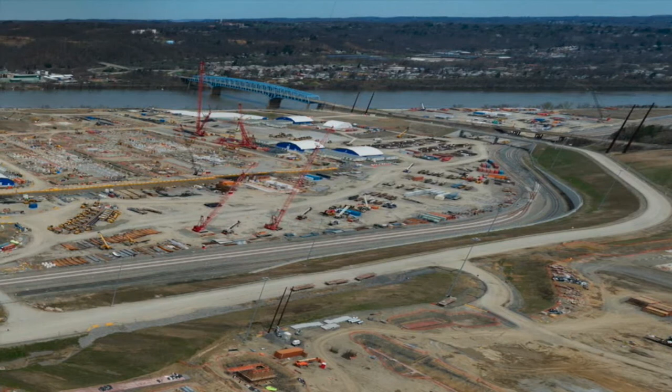The expectations you would have of a twin need to be met for a digital twin, and of course the first of those is you would expect of your twin reality—it has to correspond to the physical. We say that's about capturing the digital context of the project or the asset, and we do that through reality modeling. Reality modeling uses overlapping photographs and imagery or laser scanning to the extent that's available, but processes it into a reality mesh that's engineering ready, capturing that digital context, including the environs and surroundings and utilities and so forth for an infrastructure project.

So that's the first requirement—you could say it's the reality represented by the digital context. And then we say if it's going to be a twin, the purpose it serves, it needs to explain and provide insights and understanding into the behaviors of what we're delivering or operating in infrastructure.

And we could say that that requires veracity, if you like, explanatory capability. To me, the way we accomplish that is for our digital twin to be comprised of digital components that understand themselves. They are the stuff of BIM, if you like, but we can also glean digital components by classifying the reality mesh with machine learning, and maybe we'll talk more about that.

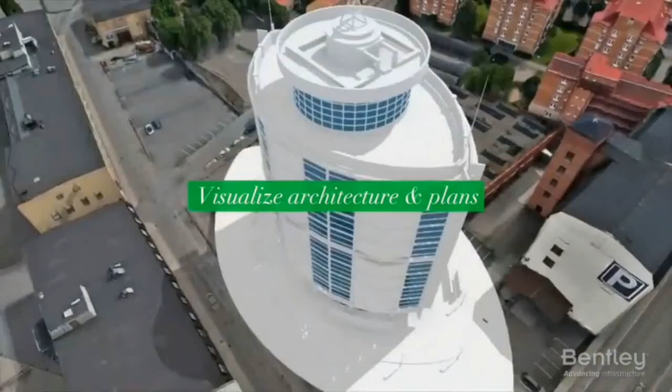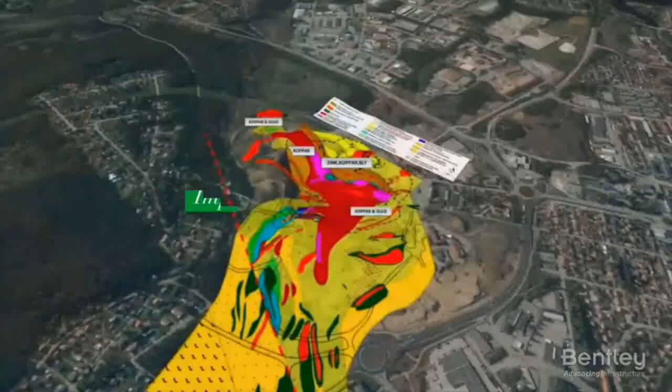But the benefits are being able to have the immersive visualization, if you like, where everyone understands the project in the same way. Everyone understands the site in the same way. It'll be an evergreen site. It ends up being enlivened, if you like, with the simulation of the BIM designs and, as you know, the vegetation and so forth that would finish it, so that it can be evaluated as well by the owners and so forth.

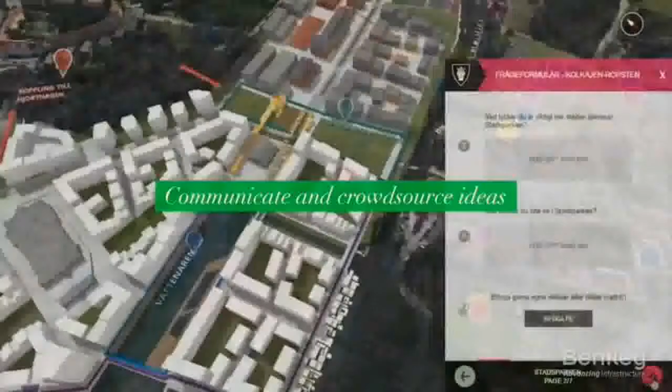Thanks to immersive visualization, it's more intuitive and, in fact, easier to use and to adopt than would be the separate technologies, for instance, of BIM or reality modeling. When you bring it together into a digital twin, for site work that's been up until now done in 2D, you can sort of leapfrog into a digital twin approach with OpenSite Designer.

So my point is that the advancements are advancements in being easier to use and approach even than preceding technologies, and certainly something that has the same immersion as in our real world is most natural to work with and provide these benefits. Analytics visibility for those who then would like to use their own intellectual property in improving their site design is yet further available in that respect.

But you asked about going to digital cities from, if you like, digital sites, and that's a matter of federating digital twins together. They all have the characteristic that they're geospatially referenceable, and in terms of computer architecture, software engineering, they can be referenced and federated together. In the UK, they talk about a national digital twin.

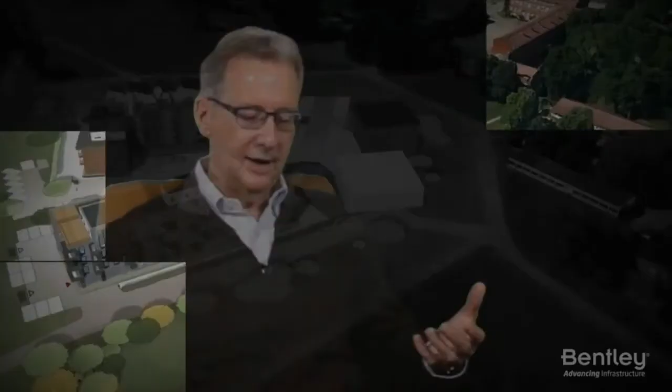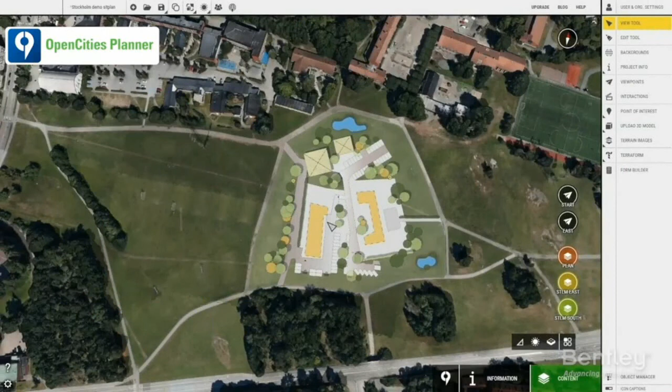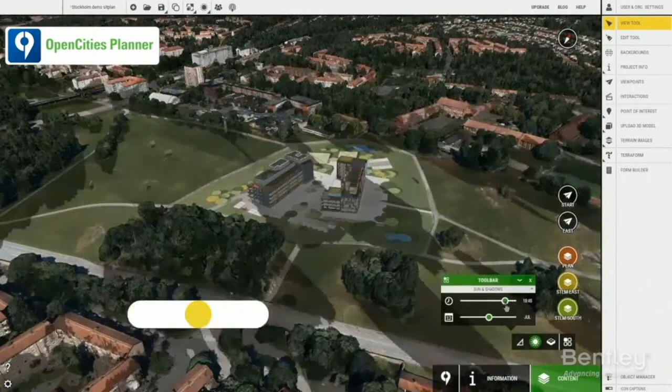The way we've applied that notion is, on the one hand, we've had some containers for self-description, iModels, we called them. Now they go so far as to create digital alignment between the semantic aspects of what different disciplines and phases can be working on in an infrastructure project and enable them to be referenced and synchronized together and their changes synchronized across a hub. We call that an open source platform. It is literally provided in open source so that our user organizations can apply their own skills, their own advancement strategies in immersive visualization. Some of them will call that mixed reality. They have teams to work on that. They have teams to work on analytics and require visibility into the engineering data.

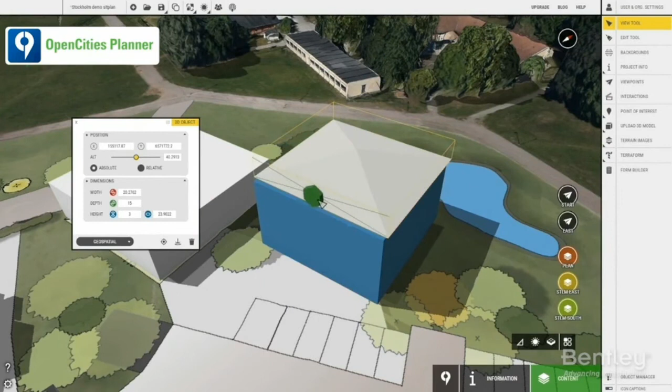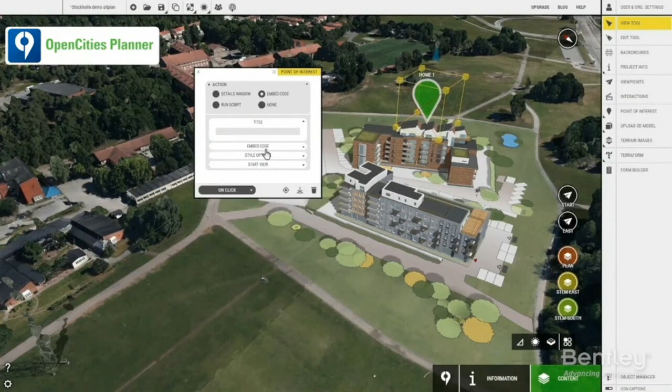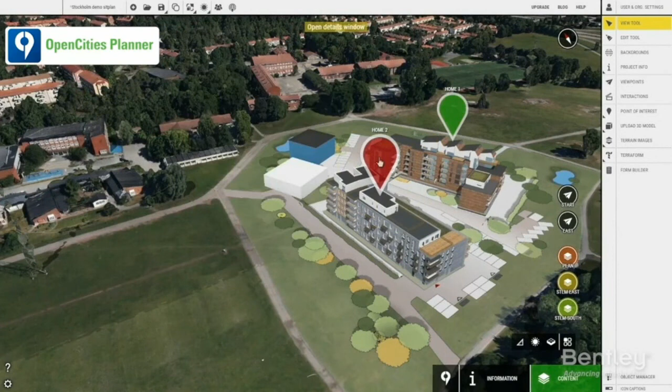It's been dark up until now, obscure formats, but if you can bring it into a hub digitally aligned and then be able to run analytics across projects or a portfolio of projects, and that data exists. The engineers have produced it. The owners have paid for it. To bring it into an open source schema and environment and platform is going, I think, to change a lot about the way we think of things in infrastructure projects and construction.

We don't even realize how much we've otherwise made the presumption that all of our data is dark and inaccessible. It's just because it's in specialized engineering formats, but when we can bridge from those formats by way of a cloud service hub to have digital alignment and immersive visualization and continuous and comprehensive status reviews, open's going to win in what we do also, I think, Todd.

Maybe you can help me explain how open source can affect things. What would be the differences or the similarities in, let's say, an engineering firm that uses mostly or all Bentley products versus one that's using a variety of products? How might some of the open source be different in those situations?

Well, you use the term an engineering firm, and I think each of them to some degree are saying we need to improve our business model, to have our own intellectual property; our means and methods are our stock in trade. How in going digital do we differentiate ourselves? And we say a platform, an open source platform that lets you apply your immersive visualization strategies, your particular devices and ways of working and collaborating, but starting from your actual project universe and the disciplines and tools you use now, and especially analytics visibility, the big data generated, that's your data, and especially aggregating and creating insights and conclusions from that.

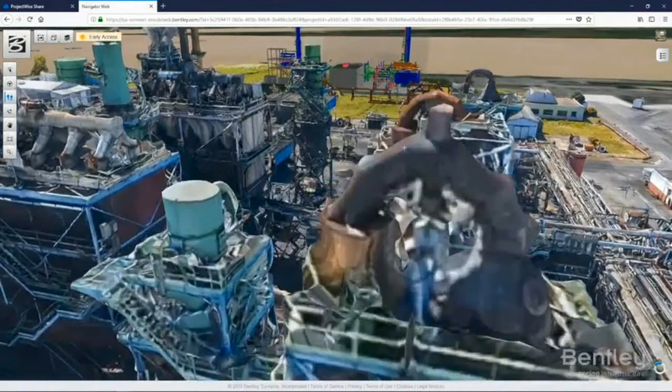I think it's what users and users on their projects will be talking about and putting things into that level of ambition and expectation that I've described. I think even a product like OpenSite, a relatively simple product in theory among our portfolio, represents a digital twin strategy, and I think that users will be advancing BIM, advancing reality modeling, putting these things together. That will be what we cover in Singapore, but we'll be in Singapore.

So Singapore is a place where going digital is a national strategy. And as you know, they have an effective government that takes a very long view in Singapore. In fact, Singapore was the first nation in Asia to mandate BIM, but now their emphasis is on what they call integrated digital delivery, and they have 4 aspects to that. So they talk about digital design, digital fabrication, digital construction, and digital asset delivery and management.

We're going to be in a country with a strategy that is fully developed, if you like, for going digital. So yes, digital twins will be much on our agenda there.

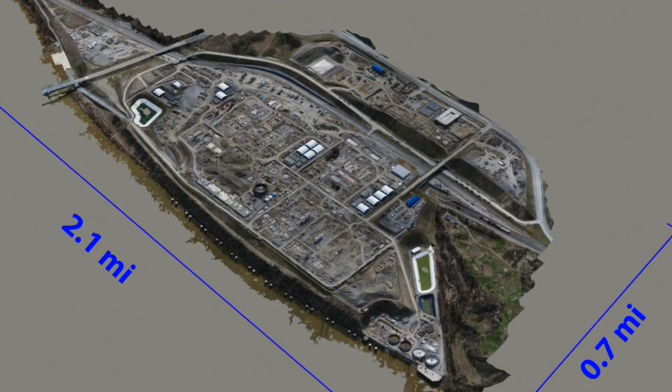But they're leapfrogging ahead to using reality modeling, using drone capture and so forth, to enable this continuous surveying that will actually put them ahead in their project timelines, where they've otherwise been waiting for traditional surveys, because they just can't wait to deliver these projects and their economic and environmental benefits. So the phenomena have been different across Asia, but we'll see in the Year in Infrastructure 2019, I think, some considerable advancement.

In the Western countries, so here in the U.S., we don't have a long-term strategy. What we do have are more and more privately financed projects, if you like, the P3s and concessions and alternative delivery approaches, in which there's an economic advantage to this integration, the digital twin approach with the digital context, the digital components, and the digital chronology coming together, managing risk and so forth. We are advancing in the U.S. in that respect.

The U.K., if we refer to a place where a BIM mandate got a start, as I mentioned, they have a national digital twin strategy that's about federation, and I think does represent where we're all headed with digital twins.

So the Singapore event's still a few months away, but I'm sure that you have a plan as far as some of the things you're going to roll out. Is there any chance you can tip us off to any of the things that you might be introducing there? I'm sure we'll inform our audience as it comes, but any sneak peeks?

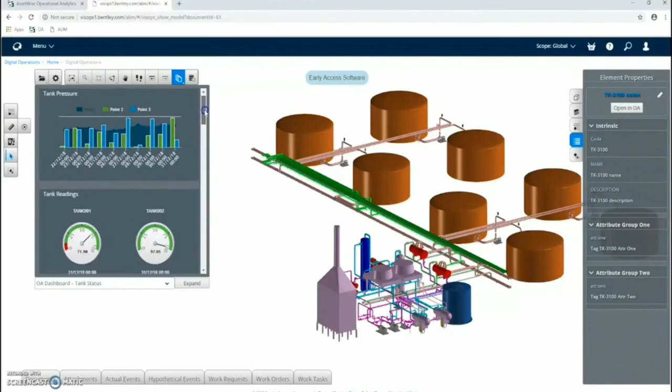Managing the construction site is a matter of managing the spaces and the occupancies and the logistics and the work breakdown. We call it advanced work packaging. All comes together. The HoloLens 2 considerably advances that.

Now everyone may have their own strategies of what and how they use that, but essentially when there is the same immersive visualization across the project team, there's one version and you resolve the conflicts, you synchronize the veracity, the fidelity of the project more certainly.

Okay, let's continue our discussion about OpenSite Designer, since that was just released on April 2nd, so that is maybe the newest product, or pretty close. I think it is, yes. Okay, so in your words, how would you describe how OpenSite Designer fits within the Bentley software universe? In other words, how does it tie the other products together?

Well, what a great question, Todd. You know, site projects aren't necessarily the most comprehensive or complex. They're often not mega projects. I know I described a site project in Pennsylvania.

That's a mega project. But every site project should start with the digital context, the veracity of the digital components, the explanatory and optimization capability for drainage, parking, grading and so forth. That should be a digital twin at the service of the engineer, so that they're not spending their time enumerating and calculating those.

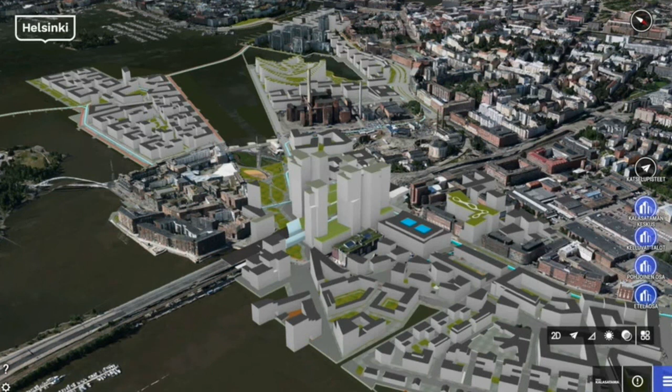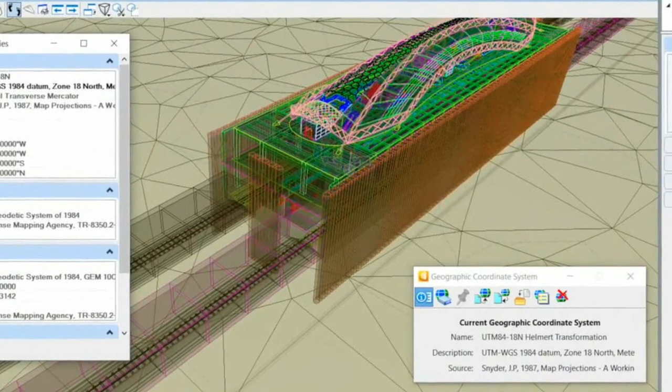They're helping make recommendations and improving the outcome, even the viability of a site project. So we've tried to put all of our discipline software together: water and drainage management, the open buildings footprint, the subsurface digital twin if you like. What are the existing underground utilities, and how are you tying in and adding to that? The geotechnical risks and borehole logs, and the reality modeling where you continuously survey to begin and then complete the project, and the live evergreen aspect of that. OpenSite caters for all of that.

OpenSite Designer, just to describe its virtuosity, replaces and supersedes dozens of separate software products we had for aspects of that, where integrating them would have been imposing. But OpenSite Designer is intrinsically integrated, intrinsically visual, and therefore easier to adopt than any of these predecessor products.

And of course, on April 16th we did a terrific webinar that you moderated, and hundreds of site engineers participated, giving it a 97% satisfaction rating, I happen to see. And I know that's still available on the Informed Infrastructure site to help with that education.

So if a firm isn't based on Bentley products, why should they use OpenSite Designer, and how would that work with the other products they have in-house?

Great question. We really work hard at Bentley Systems for interoperation with other vendors' software, and Site is an example where there's going to be multiple parties involved. I like to say our product should be facilitating what I'll call an open information project, where each discipline can choose their own tools, but there's a connected data environment to bring that together and accomplish the digital alignment that's required. I think OpenSite Designer is a good example of that, being able to handle and manage formats that are not necessarily our own, encapsulated in what we call iModels, which are themselves open source capabilities. An open information project leads the way with OpenSite Designer.